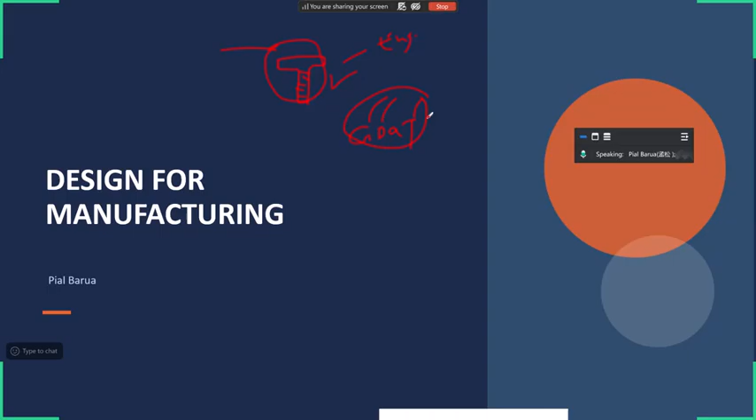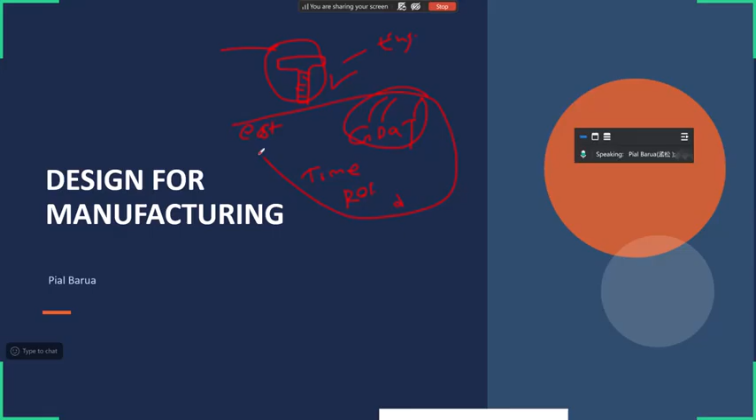Okay, I'm not so expert in this, I'm also learning this one. But hopefully I can give you a good example to get this concept. And the other important thing is cost, time, reliability, durability, whatever you say. So these terms are very important in terms of design for manufacturing.

So I have given you a teeny bit of concept about design for manufacturing, but let me go through it with some details. As I say, from the concept, when we design, I have a question to you guys. How many of you have had this concept that CAD modeling is design engineering? Did you have this even in your bachelor's or maybe in your early stage of master's?

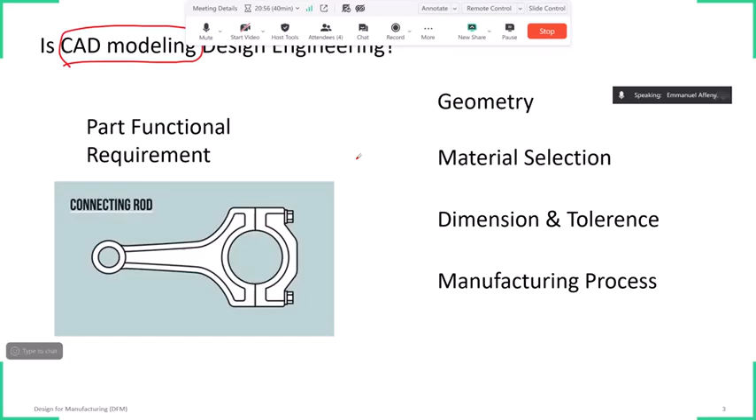Anyone? Yeah, hello, yeah, can you hear me? I knew you need the CAD if you want to design. Yes, because your idea will be in your head, but the CAD model would make others understand. So the CAD model is the basis, that's how I understand it.

Yeah, that's the same thing actually that many students have, but you give a quite detailed thing and very formally, that's good, good enough. But I will say no. That's the first thing, my boss made a clear distinction between CAD modeling and design engineering.

It is totally different. CAD modeling, there is a saying, Elon Musk has a very famous saying, that everything looks perfect in PPT and every design looks perfect in CAD modeling. But actually CAD modeling is not design engineering. Why? Because I know many students, they can do very good CAD modeling, trust me, very, very good at it.

But when it comes to manufacturing, they failed. Literally, they failed. Because they can copy, if you give them the geometry, they can copy and model, they will do some extrude modeling, cut, whatever it is, and it looks very perfect. But in real design for manufacturing, CAD modeling is not design engineering. It's just a tool to do the digital twin or to mimic the part for further analysis.

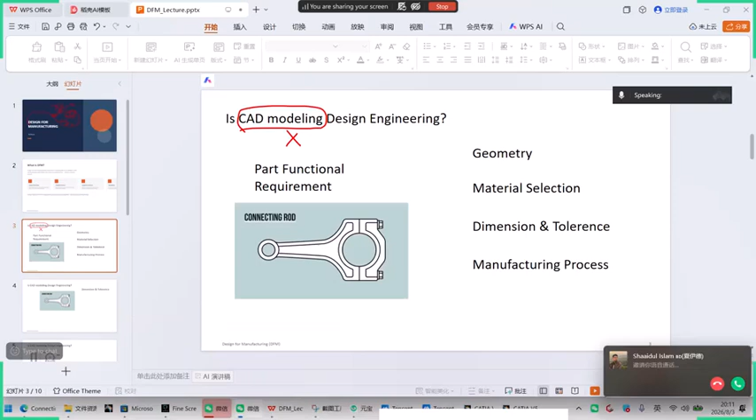Even for a simple bolt, when you are assigned to do a simple... I don't know who is calling me, oh, he called me at the wrong time. All right, okay. So when you are responsible to manufacture just a simple bolt, you can feel at that time how many challenges there are, from the concept to CAD modeling, to design for manufacturing, and finally QC and finished product. It's a very, very challenging task.

Just a simple screw, just a simple bolt, because when you do the CAD modeling it seems, okay, I have done this modeling, and many students can do this. Even many students can do better CAD modeling than many real engineers, that's true. But if those students are assigned to do the real manufacturing, not the school project, like Joshua did, I respect that...

But it doesn't have one factor, and that is called production time and cost. It doesn't have it. The real production time and cost scarcity can only be felt in the real engineering project.

I would like to share one of my situations right now. Recently, the project that my boss gave to me seems very, very simple. The task is someone already did the 3D and 2D, and I have to check if the 3D and 2D's dimensions are correct. Now it sounds very easy, but if I make a slight mistake, just maybe some part which has high precision, and do a 0.001 difference, that can cost a lot of money. And I'll be responsible for that.

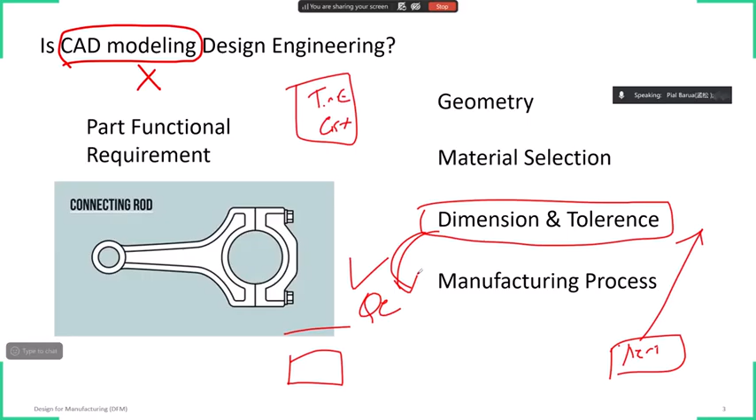Okay, if you don't have any idea, it's not a big deal. I'll also get used to introducing it right now.

So I'm going to open my CAD.

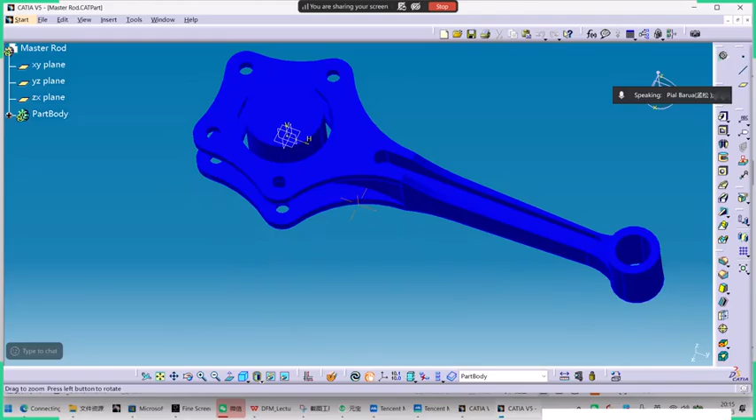Let me ask you a question, guys. Are you feeling bored or something like that? I'm not a good lecturer. Oh, we are listening, we are okay, we are listening. All right, thanks for listening to me.

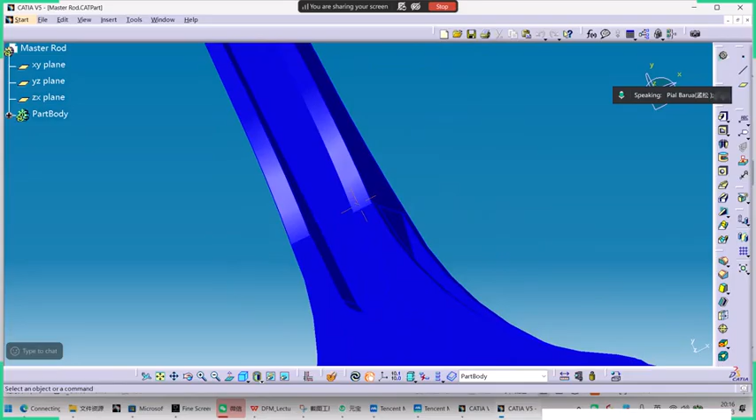So we can see this connecting rod, which I actually designed during my practice. I don't have any real business with this thing, I was just practicing. It seems very, very perfect, ready to manufacturing. Seems like that. When I was doing it, I was feeling like, oh, I become a real automotive engineer.

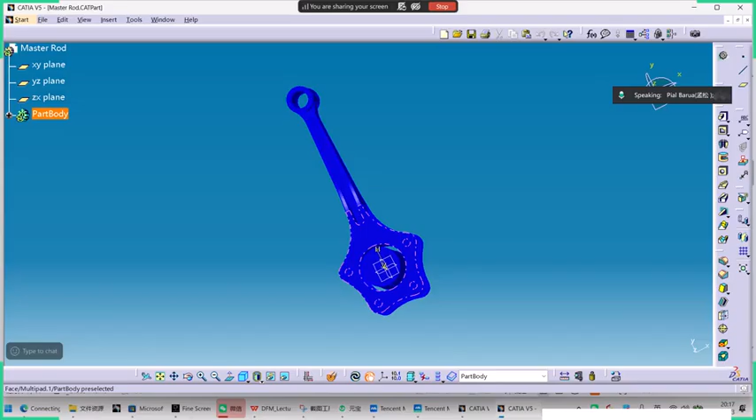But, you know, if you're familiar with CAD modeling, there's a part design workbench and assembly design workbench, right? Drafting workbench, many more. So it seems perfect when I did the part design, but this part has to be assembled with some other part. Like I have to assemble this connecting rod's small end bearing with the piston gudgeon pin, and this big end bearing with the crankshaft.

Now imagine this gudgeon pin hole, the big end bearing, sorry, the small end bearing. It's called bearing, that means it bears loads. And when I insert the pin here...

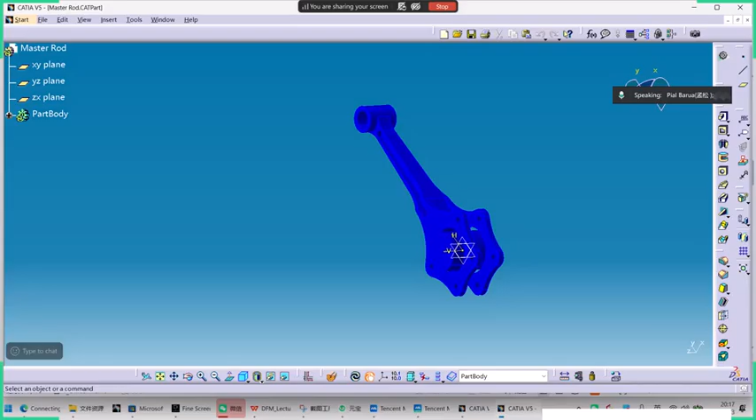Of course the pin is not fine-tuned because not many manufacturers can use CNC machine or laser cut or hydraulic cutting machine. These precision manufacturing processes are not available everywhere. Even in China, you can still see some manufacturing processes using a traditional lathe machine. They're doing basic machining and then exporting the part according to cost and requirement.

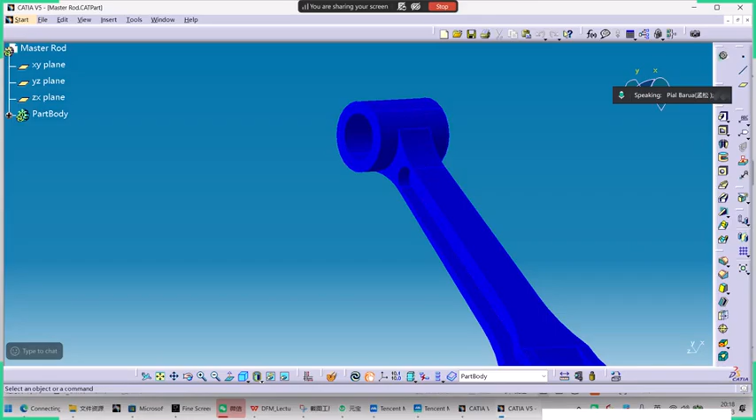So high precision is not there. If you make some mistake, this bearing can cause mating issues and a lot of trouble, and your customer will complain because it's ultimately affecting their product. Suppose you're supplying to an automotive OEM as a connecting rod manufacturer and you made some mistake because every section is not precisely the same in the piston pin.

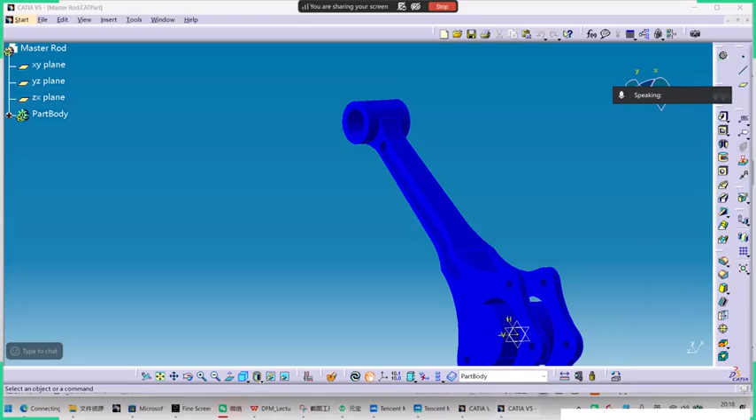So that's why, let me give you an example. Oh, where is the PPT? Okay, let me draw the piston pin. Let's say this is the piston pin. In every section, the piston pin is not absolutely geometrically equally constrained, right?

Somewhere it's got maybe 0.01, 0.02, this kind of difference will be there. So on the other hand, you have this connecting rod where the pin will get assembled. You have to put a certain limitation where the lower limit and the upper limit can fit into the connecting rod, and that's called tolerancing.

So for tolerancing, if the piston pin diameter is, let's say, 25 mm, when we add 0.5, that means the machinist can understand that this pin can alter between 25 mm plus or minus 0.5, that's 25.5 or 24.5. This is the maximum and minimum limit, and this is called tolerancing.

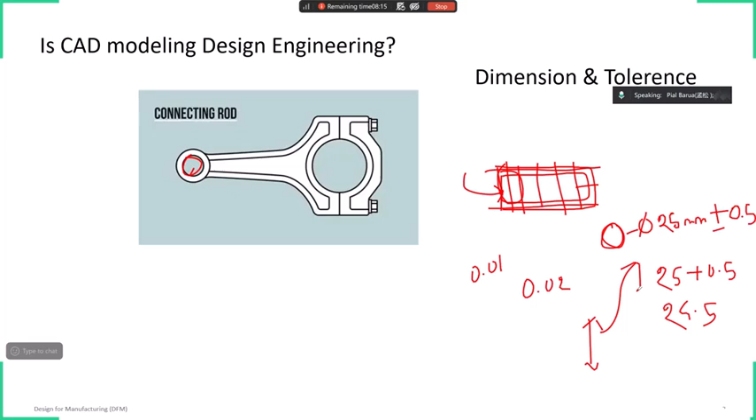You attach a tolerance. In every assembly, remember this, in every assembling point, every assembling unit, this tolerancing is very, very important. And the dimension, it's simple - center distance, any dimension. I will give you a very real example a couple of minutes later. So that's called geometrical dimensioning and tolerancing.

But the tolerancing has its norm according to different organizations, just like in engineering drawing we have some rules, right? Of course you can do the dimensioning without tolerancing, but that's not a standard. Machinists will often fail to produce your design product.

So when you do the CAD modeling, you have to think like that - you are a machinist, you have a lathe machine in front of you, and you are cutting that part just as machinists do, so that you can feel the machinist and his perspective. And GD&T is a language between an engineer and a machinist.

And that's just a small part of design for manufacturing. If the manufacturing process is changing, then the design will also change.

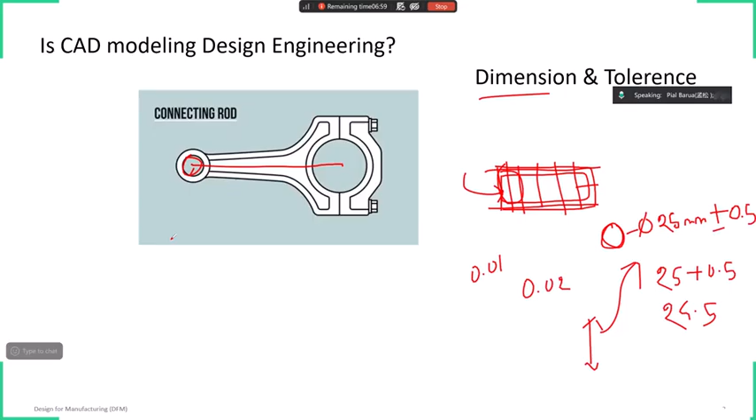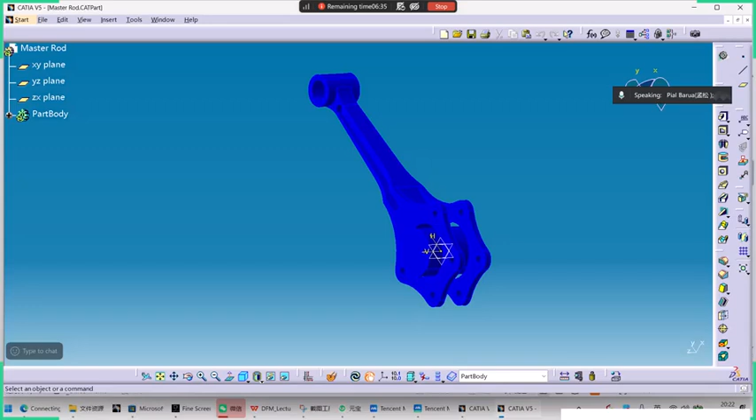Okay, so I will give you an example. Let's say I finish this 3D. Now, if I give this 3D, that's not going to be okay for the machinist. We have to give the 2D engineering drawing. So in CATIA, you can go for drafting.

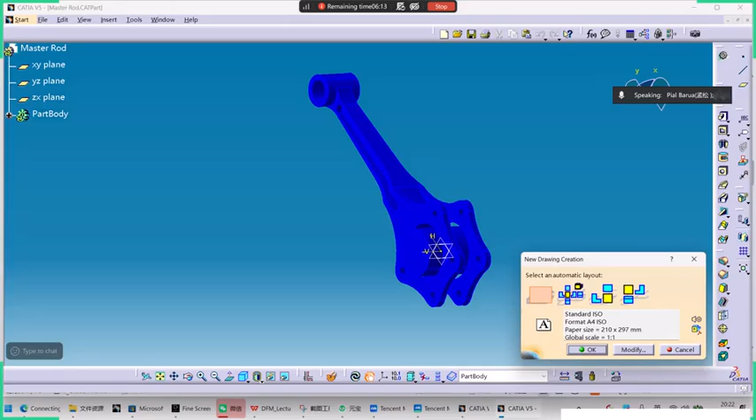I think you guys are familiar with this, because in engineering design we have different rules. So according to the sheet, you can choose your sheet. I'm just choosing one just to elaborate, so I will fetch up this. Let's say I will take this portion.

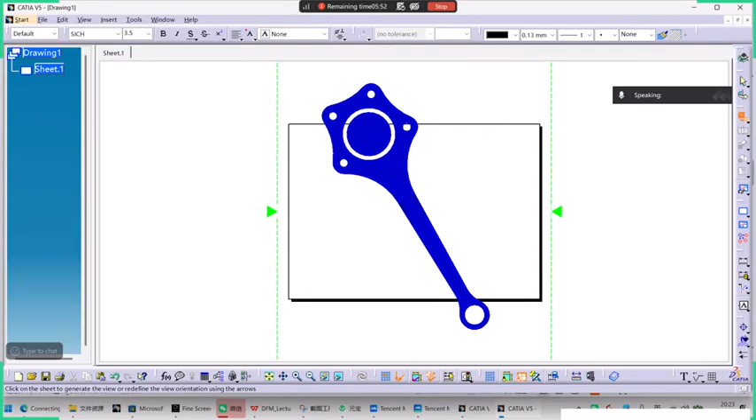And right now I'm actually doing the 2D thing, and it seems easy, but it's quite difficult because you have the dimensions with it. So let me change the scale, let me put it 6. Maybe it's okay, yeah.

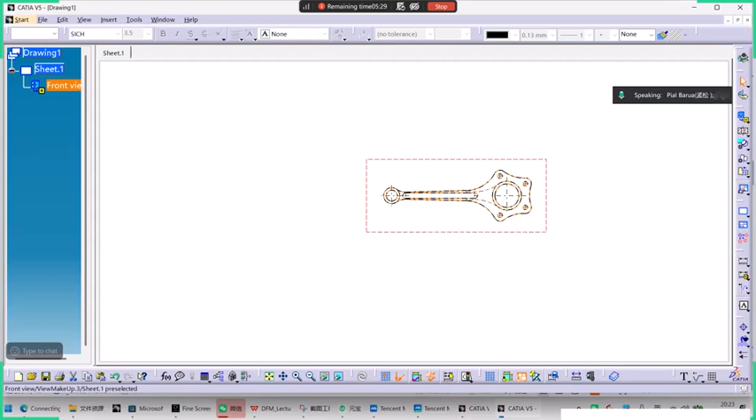I think you guys can remember your first year of engineering college, you had to carry the T scale and draw in engineering drawing classes. This is the real engineering sheet, but in CAD. Anyway, so...

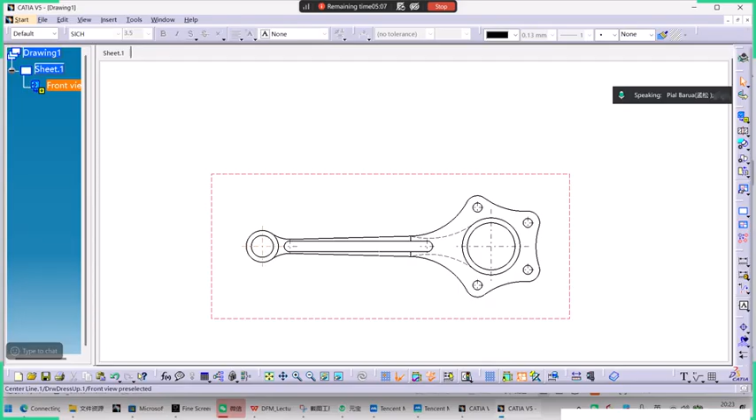What I'm doing is just giving a dimension here. See, just a dimension, 250. So the machinist can understand the difference between the center point here, but maybe you want to give more detail.

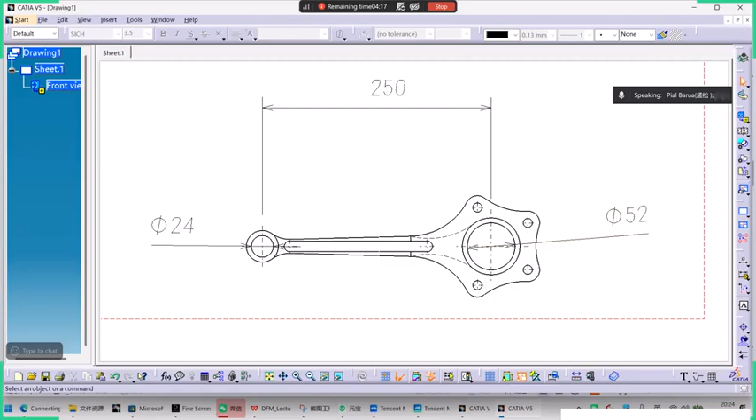Now, when you see this mark, it represents the diameter. This is also GD&T, because GD&T has two parts: one is the dimensioning, and the second one is tolerance.

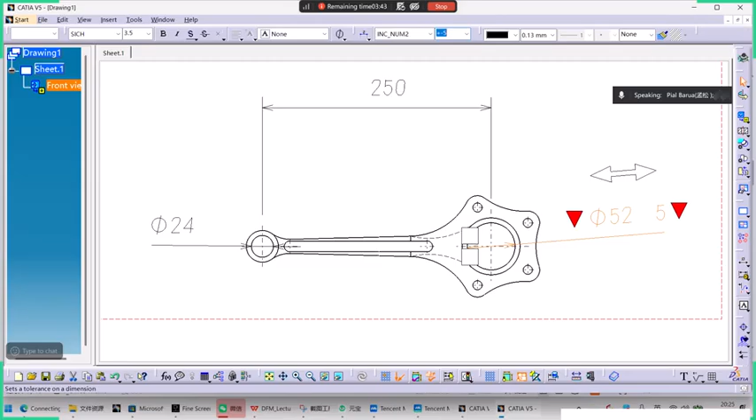So let's say I want to give a tolerance, and you have many kinds of tolerancing systems, and I put this one, and I want to make the machinist understand that when he bores this and does the machining work, he can alter by plus minus 5. I don't know why the plus minus symbol isn't showing.

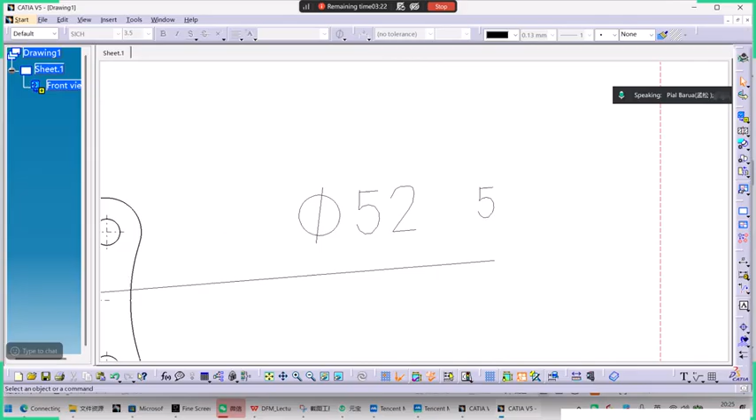I don't know what happened, sometimes there's some problem with my machine. Let me change this and see. Nope. Anyway, there should be a plus minus mark over here. Okay, so this is called the GD&T.

All right, so do you guys have any question? This is all about what I wanted to present. And if you don't have any question...

Okay, I will go to the second part of today's session, like job things with CATIA or any other CAD modeling here in China. All right, maybe someone wanted to tell something. Yeah, I interrupted. I think you can go on. Okay, I don't have a question.

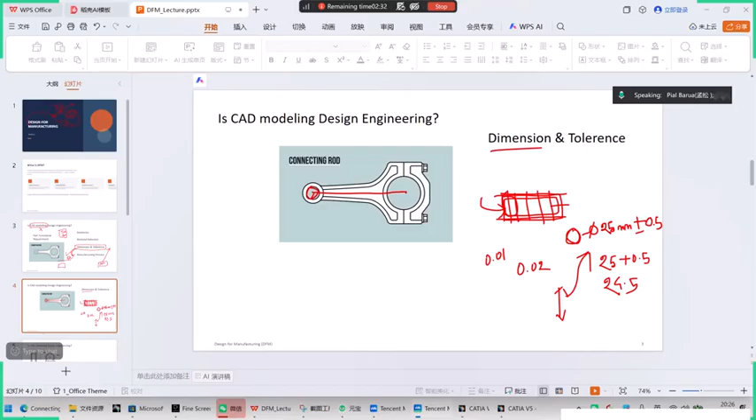Okay, great. So as I mentioned in the group, if you want to find a job in China, you can choose design for manufacturing or CAD modeling, because that's an easy thing to do. And I know you guys will face some confusion when choosing your career, because some of you will ask yourself whether to go for this CAD modeling stuff or not, if you're doing control design or thermal design instead. But trust me, CAD modeling or design for manufacturing processes, these kinds of jobs are quite easy to get, especially in our city.

But the only obstacle you have to face is the Chinese ability. You have to have a good ability in Chinese. What I mean by good ability is not that you have to speak very fluently like a native. No, intermediate skill is quite good enough, because you can still use a translator, but at least you have to know intermediate Chinese.

Okay, and you can use the Boss app. There is an app, and in the Boss app you can see many jobs there. You just have to make a good profile and upload it.

So my whole purpose is to tell you that there is a scope for design for manufacturing jobs in China, and a big amount of jobs are there. A lot of jobs are there, because these positions are actually empty, since when fresh graduates come in, they leave the job right after 1 or 2 years.